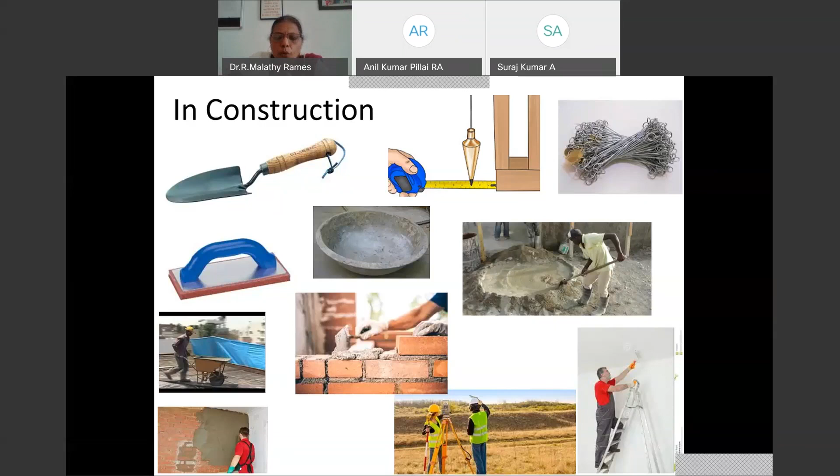In such a case, definitely we have to move towards digital construction. This is what construction 4.0. What is that construction 4.0? It is nothing but revolutions in industry. Earlier we have industry 1.0, which is mechanization, steam power, weaving loom. Industry 2.0 is mass production. Industry 3.0 is automation, computers and electronics. And industry 4.0 is cyber physical systems, internet of things and networks.

With these technologies, manufacturing industry is going to face a tremendous change. The earlier steam engine, everything has gone. Now the new manufacturing technology is completely digitalized. In such a case, construction 4.0 is facing the fourth revolution in construction, in which 6 technologies are going to play a vital role. Definitely these technologies will make the client satisfied with the fastest construction and also quality construction, and a systematic way of construction is possible with this fourth revolution.

So virtual reality and augmented reality, prefabrication, 3D printing, drones, internet of things, and artificial intelligence - these 6 are going to play a role in very near future in the construction industry, making civil engineers and construction technologists work in a fast and comfortable way. We can also work like an IT engineer in a hi-fi environment, not going to site and standing under the sun, looking at quality and struggling with uneducated laborers.

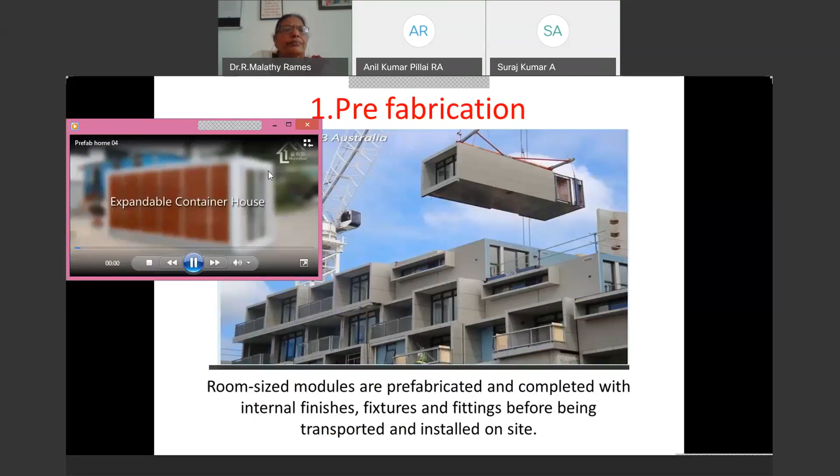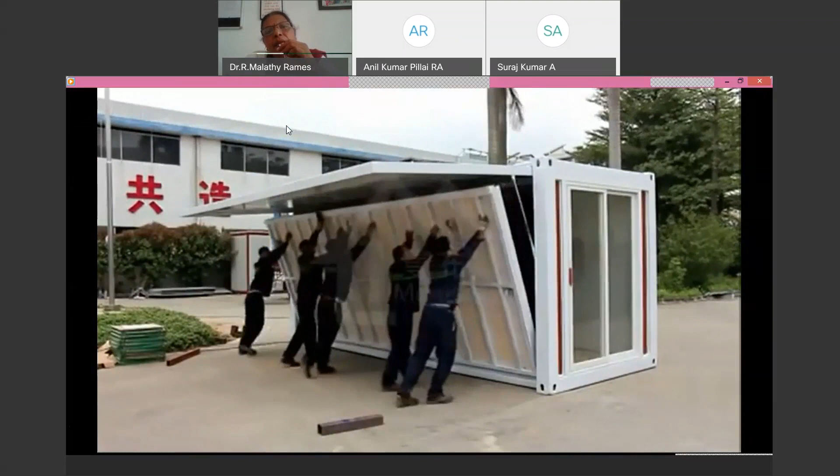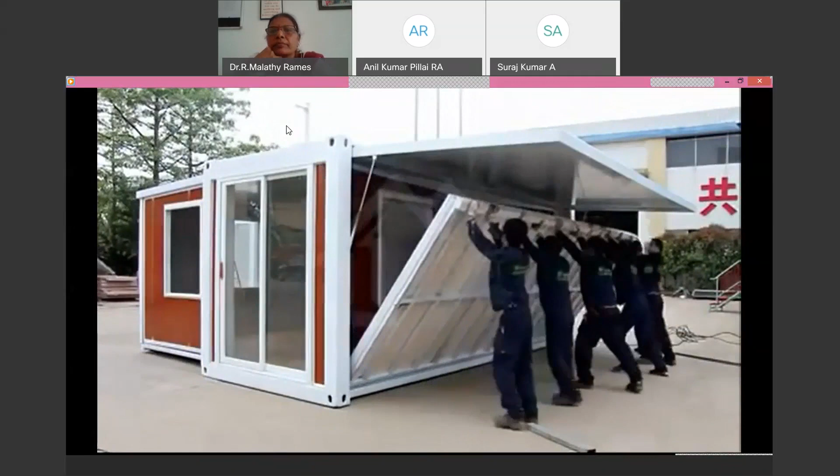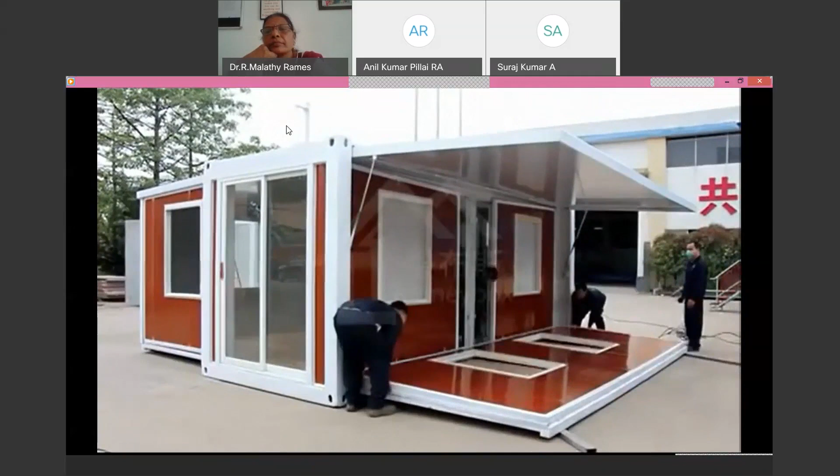It's container-like - a house is made and it can be assembled at the site. So whenever and wherever you want this house, you can make it and transfer this container anywhere. The doors are fixed, windows are fixed, locks are also there. Flooring is completed, and you could see that the toilets and bathrooms are finished with tiles.

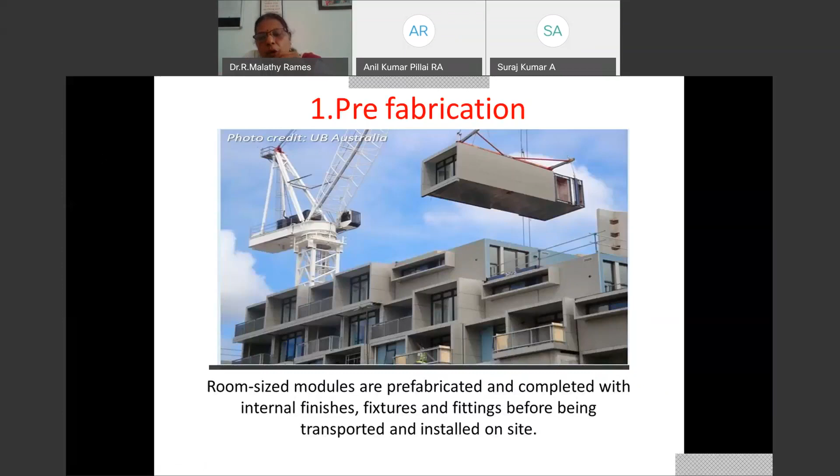So this is the advancement in prefabrication and modular construction. You can see this picture - the complete office room is being erected at the site, and you can have modules like this prepared in the factory and assembled at the site. This makes construction very fast and simpler, and it will not affect nearby buildings. Without any dirty things, we can make it very fast, and overnight you can assemble everything. This is the faster way of construction that's going to happen in the future.

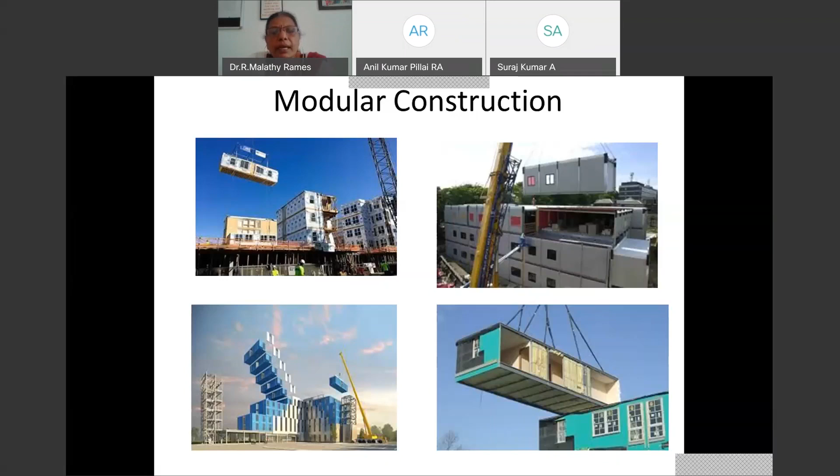So only the precast industries are going to make the modules as per ISO standards and other requirements. All the checks will be made at the factory before assembly. As civil engineers, we have to learn about the new materials used in these precast elements and how the joints are made. We need to understand this better, and our involvement in the design part is going to be very high.

Good, very good. So let us go to the second technology in Construction 4.0, that is virtual reality and augmented reality. What is virtual reality and augmented reality? Both are almost the same with some differences.

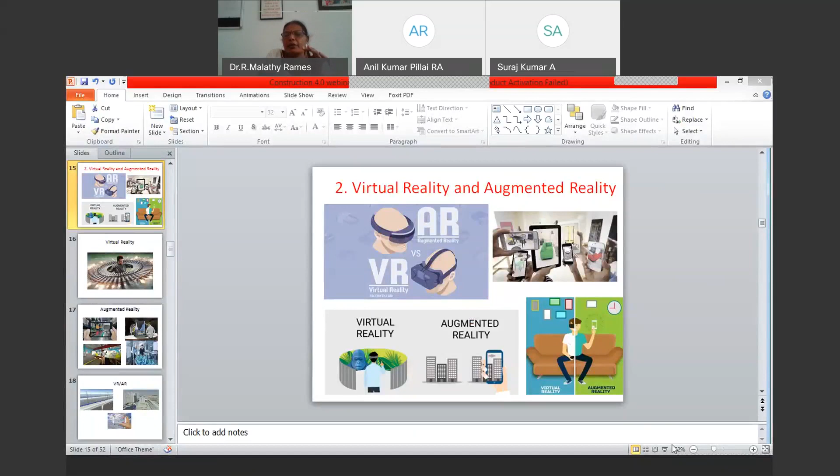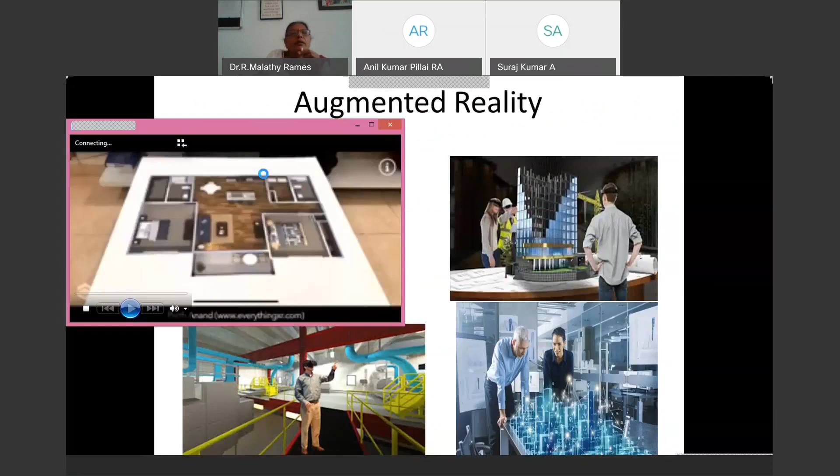So here he is doing this with the plan - he is able to visualize where the pipelines are going and how the buildings are projected. He is seeing it with the naked eye, but it's not possible without some mobile or laptop with an app. If you download that app, you could see that, through this mobile app.

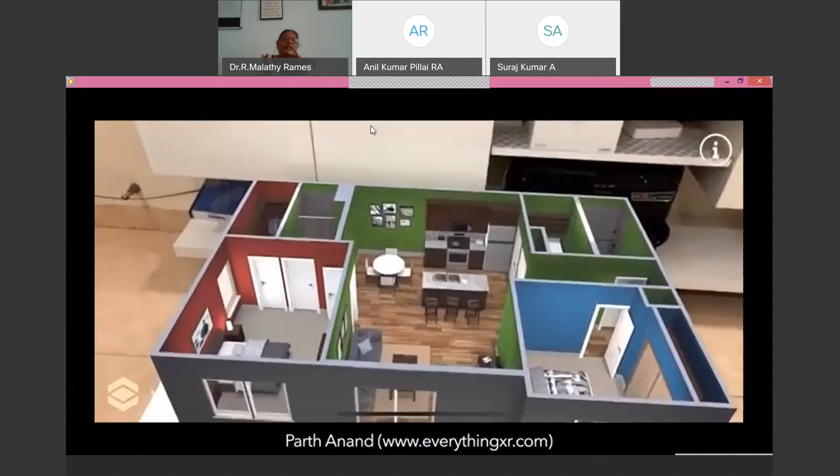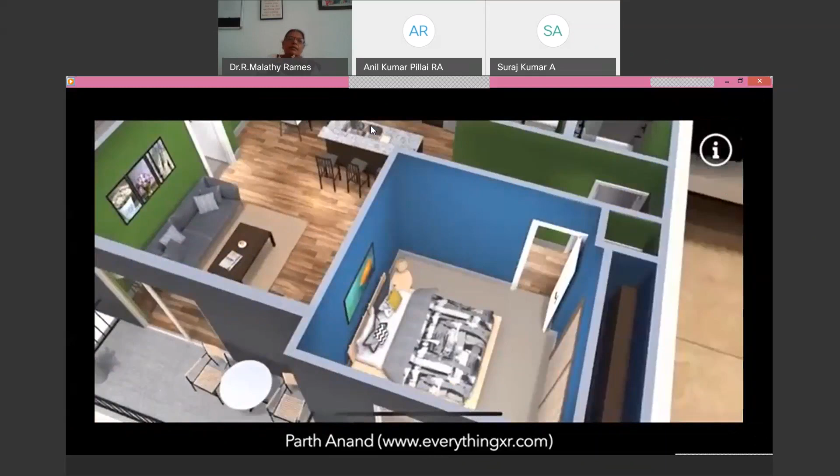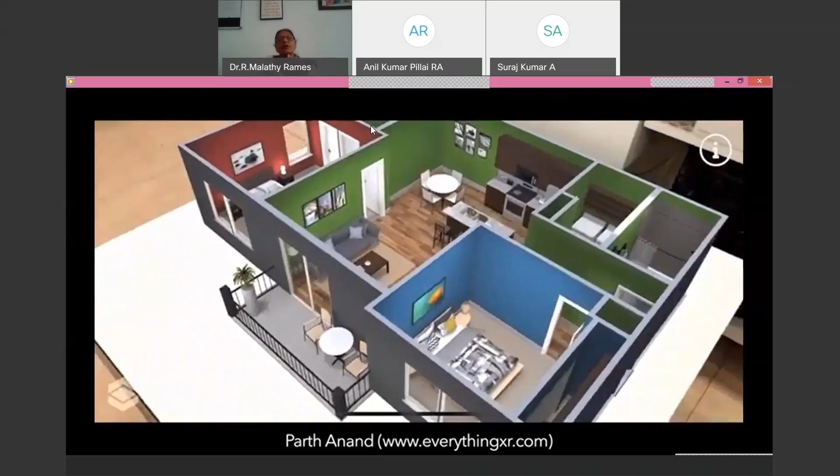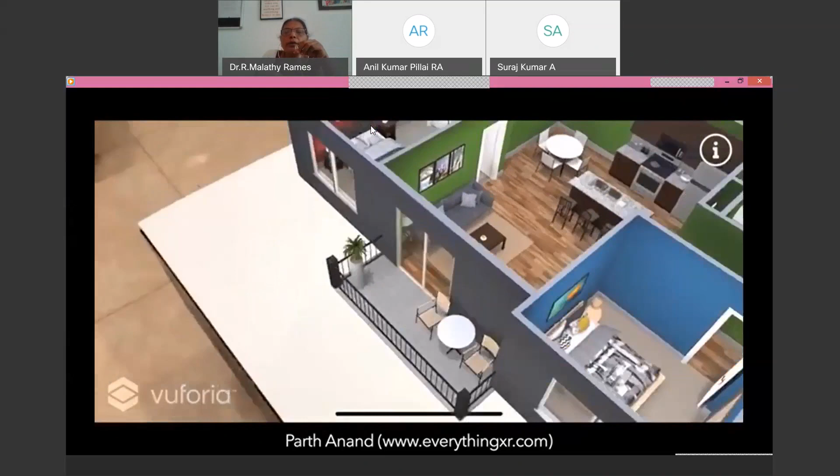This is augmented reality for architecture. The plan of the building is shown in a projected way with the paintings, where the partition walls are, where the bedroom is, how the beds are arranged, where the dining hall and hall are - everything you can show to the customers with augmented reality, so they understand better how the building in future is going to be. After construction is over, during construction, clients change their mindset and change everything. But if you show them at the initial stage itself, they understand the finishing of the building, so whatever changes they want to make, they can make at the initial stage, and understand better their future dream house. This is the advantage of augmented reality.

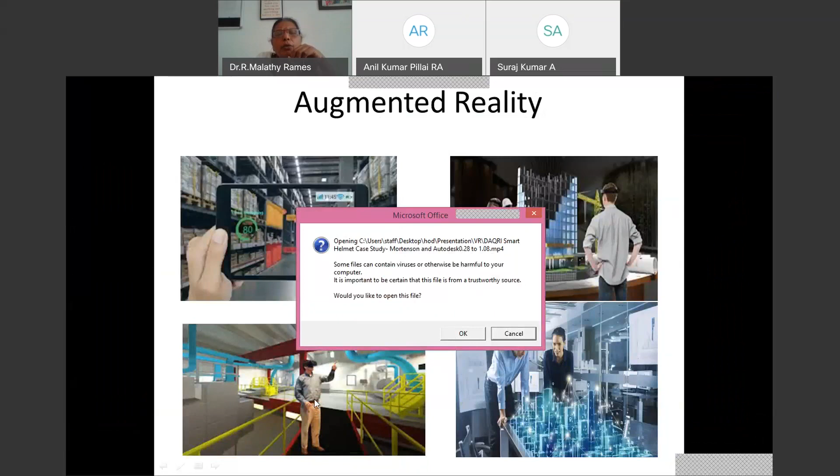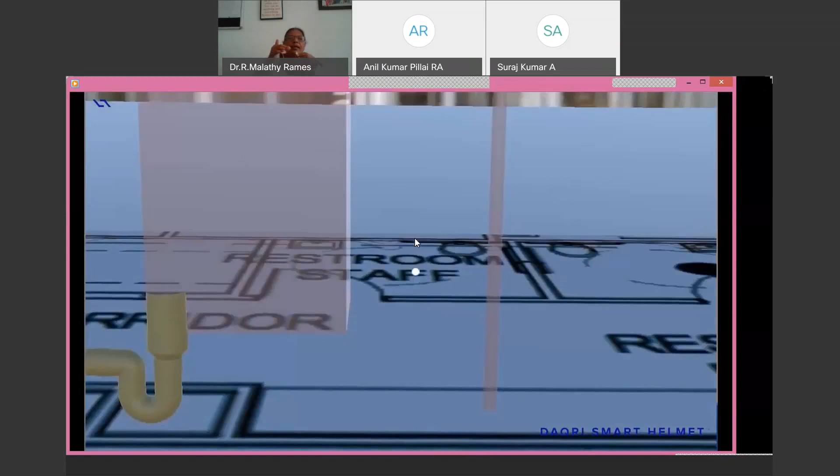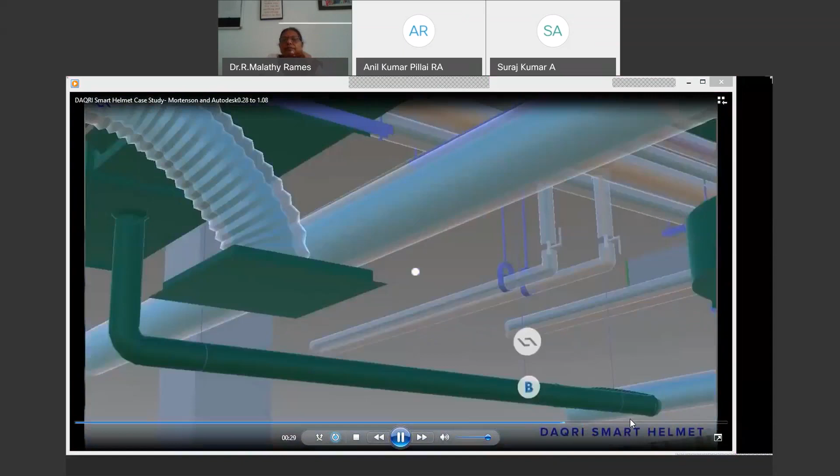In virtual reality, you have to wear some gadgets - that is the difference. If you wear this helmet-like glass gadget, just by crossing that particular place, it will show you, according to the plan, where the pipeline is coming. You can see the AC duct and pipelines. It is a smart helmet - just wear it and visualize the plan.

This is virtual reality. So in augmented reality, you can augment the things as a 3D object, viewed through mobile phones, tablets, or iPad. But here, you wear the gadget in which the software is installed. Just by walking through, you could find out where the pipelines are going, where the AC duct is going, and where the wall is - everything you can find out.

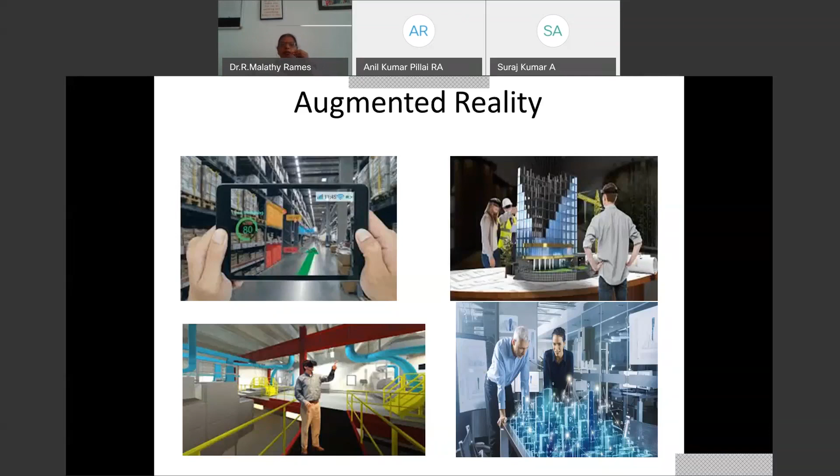By using augmented reality and virtual reality, you can very well satisfy your client about their building or construction, how it will be in future, and what measures you have taken for making that building effective.

For example, for a flyover or bridge construction, if you want to submit a DPR, detailed project report, to the concerned authorities or ministers, just showing them the plan, they will not understand.

Whereas if you show them virtual reality or augmented reality, by which how the roads are going to be constructed, where it goes, where you will have the toll gate, how during construction you will manage it without affecting the traffic much, and what preventive measures you are taking, everything you can very well explain to them.

For example, you can see this video, you will understand better.

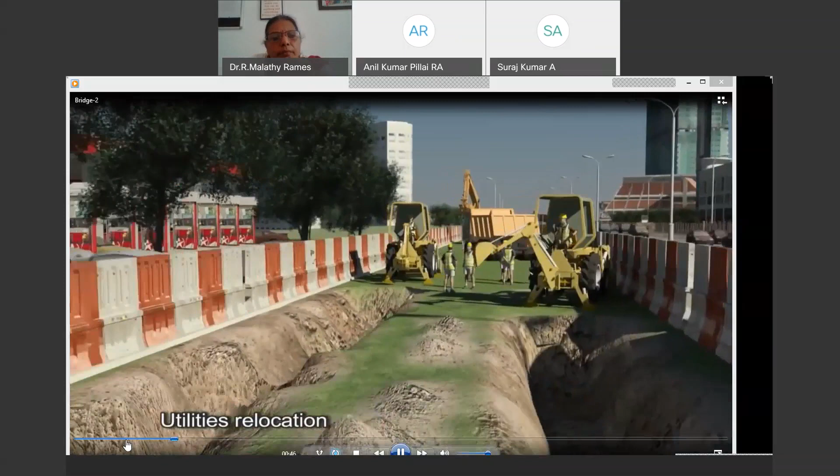See here, the construction is going along the side of the road, how the work is going on without affecting the traffic, what safety measures you are going to take, how the relocation is being done, and how the cables and pipelines are going to be managed.

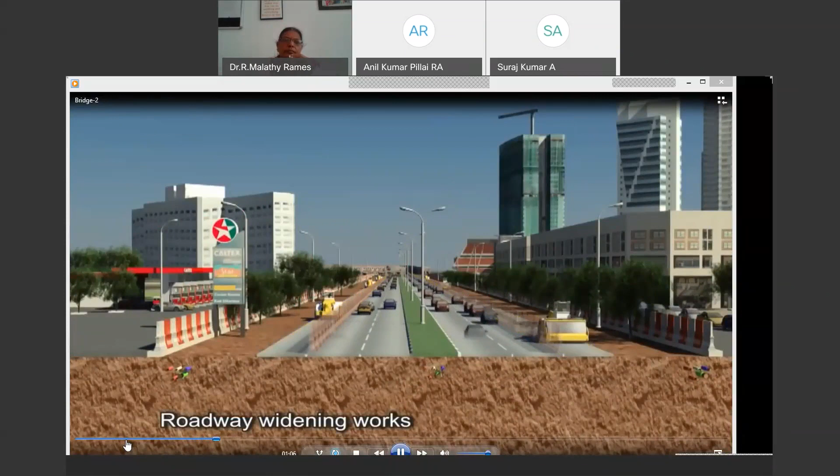Suppose if you want to widen the road, how are you going to make it? Suppose in the center portion you want to do some construction while traffic is allowed on both ways, how are you going to do it without affecting the traffic, and the road user should not feel uncomfortable?

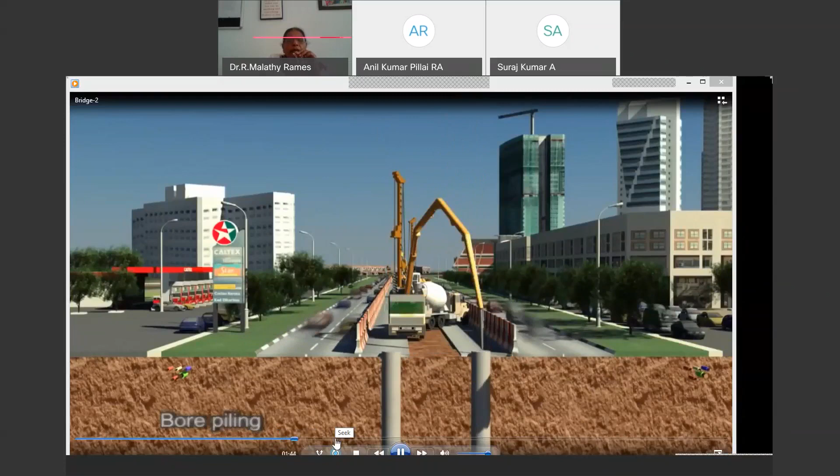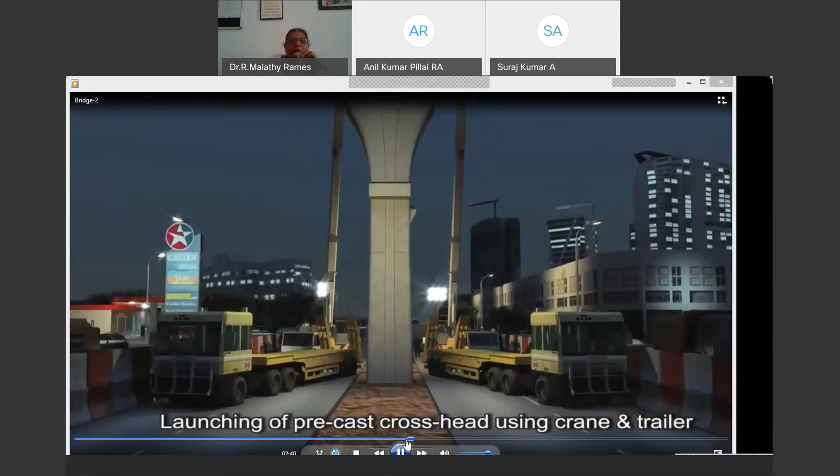In that way, you can make it with safety. You can show them how the precast crosshead is being erected during night time without any traffic, and how you are going to make it.

So that you can make the construction time much shorter.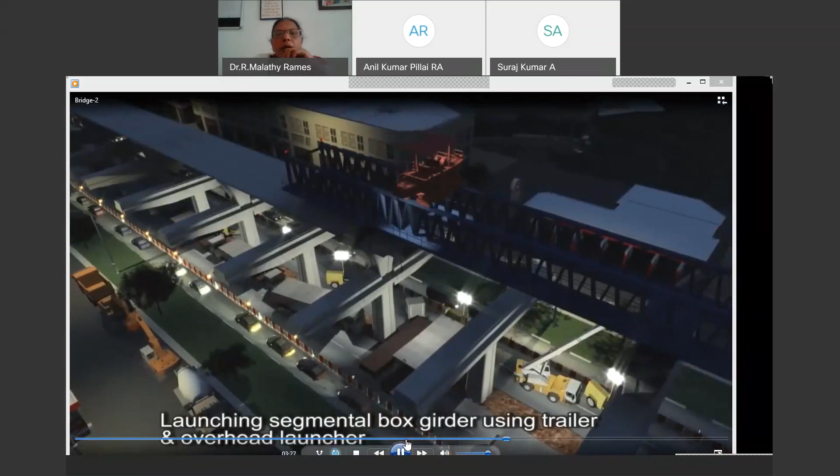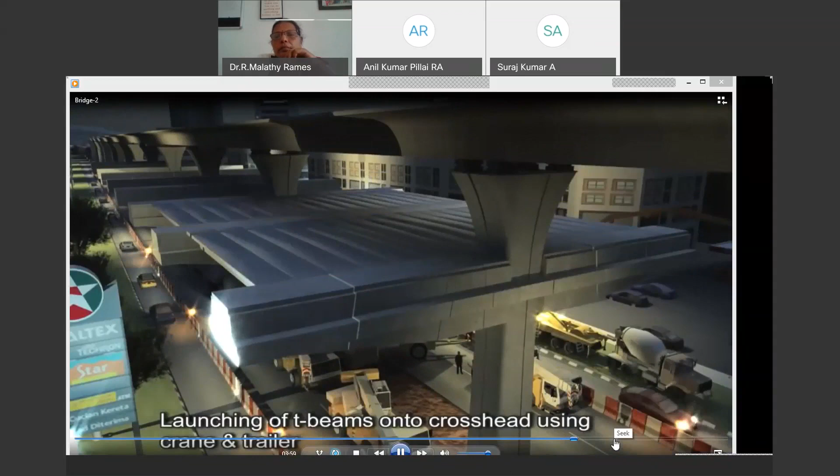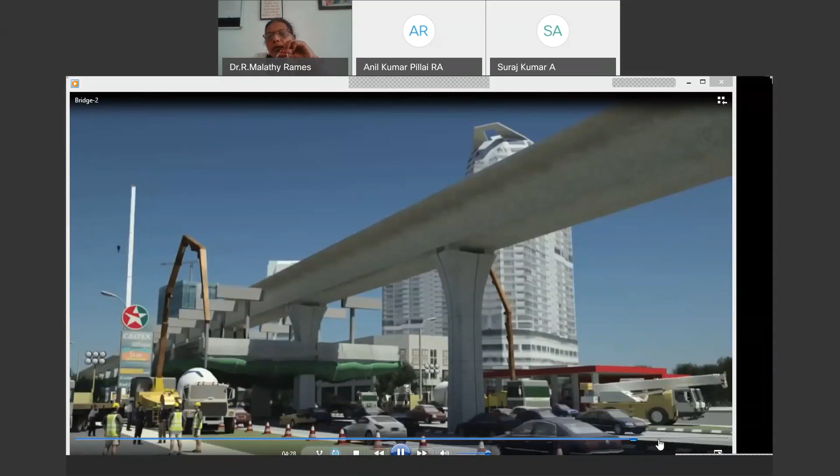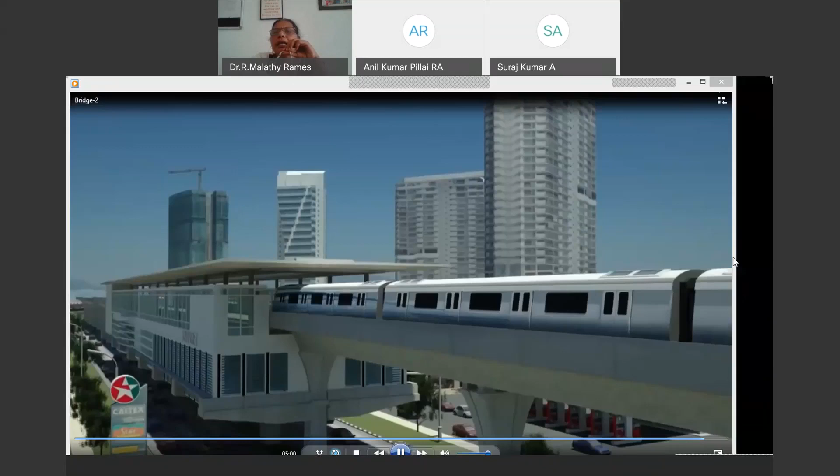So all of this is virtually shown. It is not real, it is virtual reality. How each and every stage of construction is going to be performed can be explained to the concerned authorities and ministers very well. They will understand better, so that we will get the project.

So in such a way, if you know these tools, apps and software as a civil engineer, we can play a very good role, so that we can make construction easier and faster by having these technologies. So one is prefabrication, and another one is virtual reality and augmented reality.

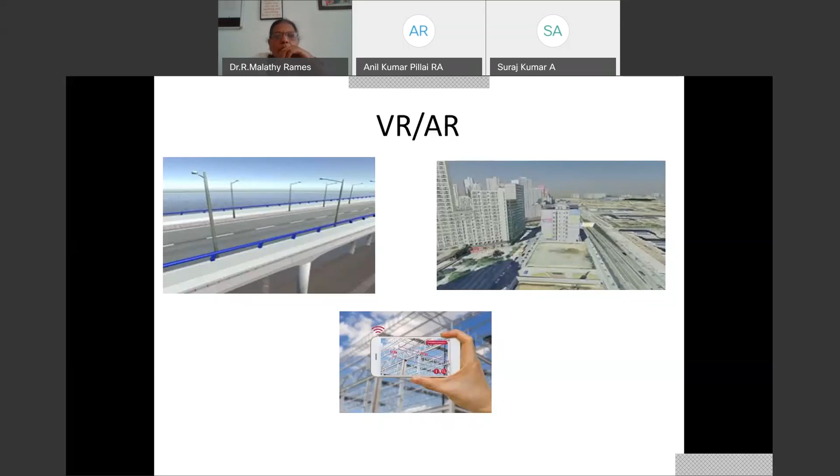Before going to the third one, let me have the answer from the participants.

It's very simple, very very simple. 256. Venkatesh, yeah, you are right. 256, Hari, I think Venkatesh has got it. Very good, very good. So 4 power 1 is 4, 4 power 2 is 16, 4 power 3 is 64, and 4 power 4 is 256.

Good, so next let us go to the third technology, that is drones. Drones are used for surveying purposes in the construction industry, not only for surveying. There are many more applications using drones, which will make the construction industry faster, quicker, and with quality. So in future we are going to have drones to monitor the buildings.

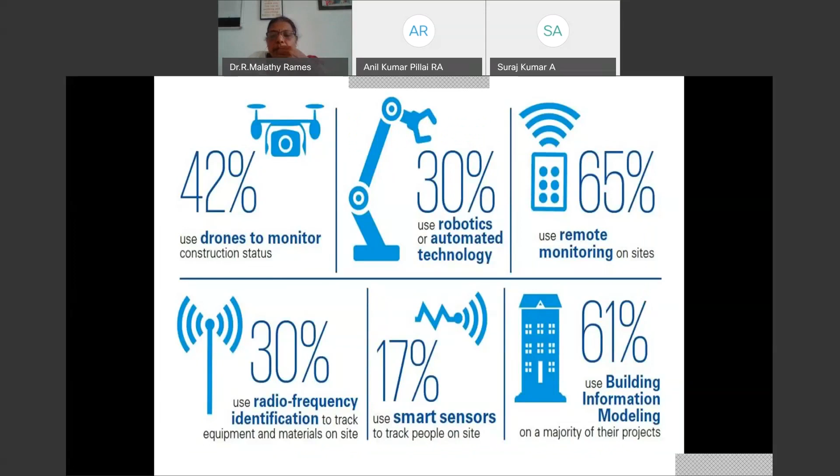30% robotics and automated technology are going to come. Remote monitoring, radio frequency identification, smart sensors, and BIM, building information modeling, are areas in which drones are going to play a vital role. So in the construction industry, drones are going to transform the entire industry.

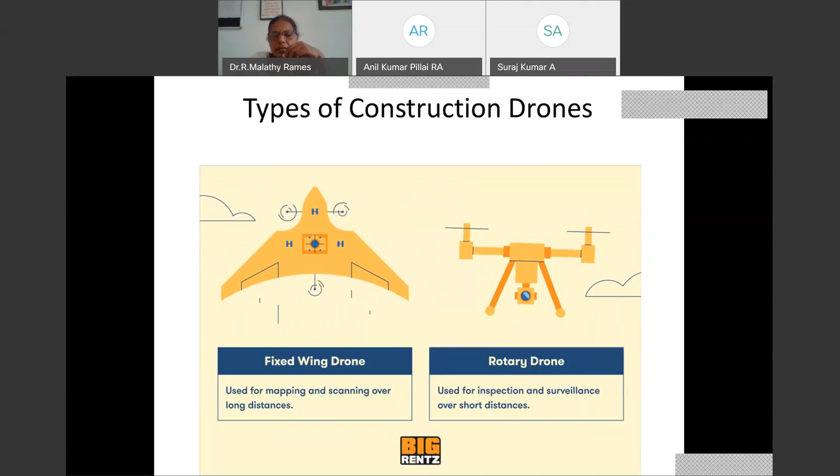We can have two types of drones. One is fixed wing and another one is rotary drone. Rotary drone can rotate 360 degrees and capture images.

Actually, a drone is like the small helicopters you might have seen used in marriage receptions to capture images and video. The same thing, with high resolution and sensors, that will be a drone. The main purpose of using a drone is only to capture the image, and from the image we have to analyze and interpret the data.

GPS, the global positioning system, we can have it, and a thermal sensor should be there inside the drone, along with very high resolution cameras, and there is software to manipulate and interpret the data. So this is what the main things involved in the drone are.

So you can fly the drone to any place you want, and it will capture the images. From the images, you have to interpret and give the output. The images you take, you have to post-process using some software, so that only then can you interpret the data very well.

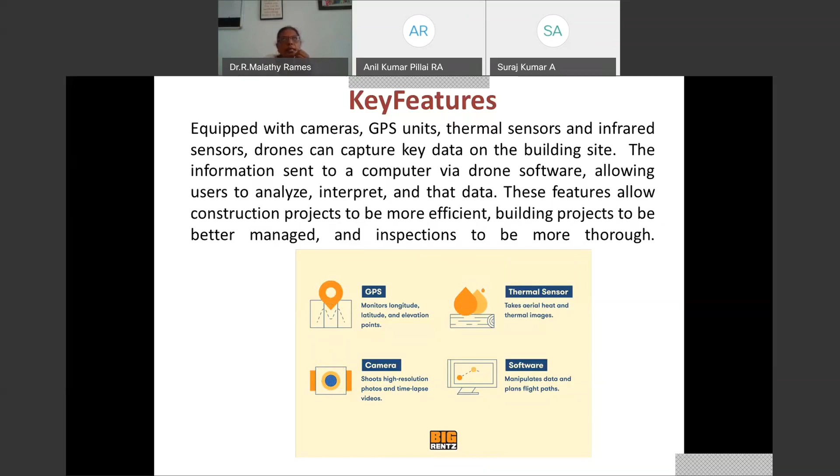It depends upon the post processing—only then you will get highly accurate results. This is used for topographic mapping, land surveys, equipment tracking and automation.

You can use it to keep track of each equipment's location on a job site, recording errors and malfunctions. Suppose you need not go to the site and supervise it—from your place itself, you can view what is going on. The drones will capture everything, and through artificial intelligence, you can track the vehicles also.

Suppose, for example, you are sending a vehicle from one place to another. In between, the driver takes some time for some other purpose and it gets delayed—everything can be monitored. And if you are ordering concrete from an RMC plant, the RMC vehicle coming from there can also be monitored.

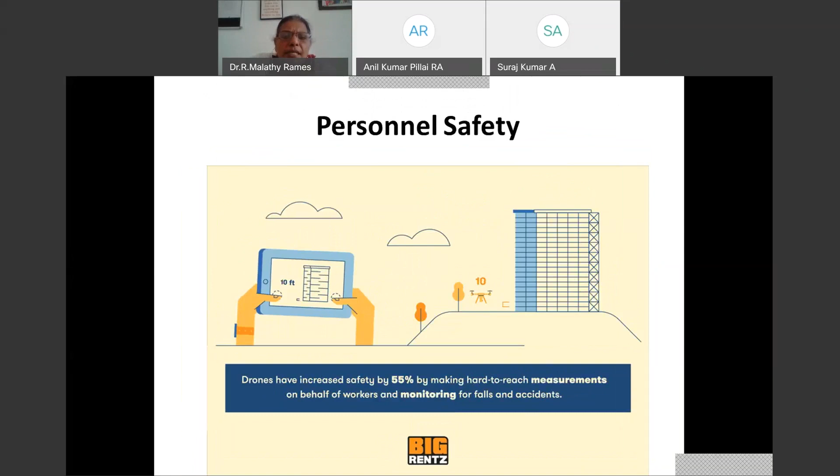You can also monitor the construction progress—per day you are aiming to complete the building to a particular height, so you can monitor whether it is going as per schedule or not. Remote monitoring and progress reports are possible, security surveillance is possible, personnel safety is also possible, and you can inspect the structure.

Suppose concreting is going on in a very tall structure in a marine environment—you cannot go and see whether the work is going perfectly, whether the concrete is being done properly. In that case, through drones you can capture the image and find out whether there is any flaw in the concreting or any honeycombing. Everything you can see.

So this is the advantage of going with these drones. It can be used for railway tracking and highway alignment, even for painting. Crack detection can also be done with this drone.

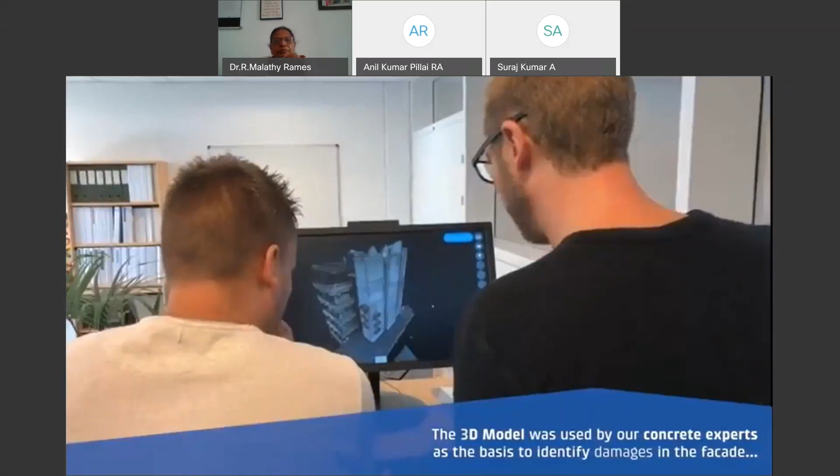So see here, the concreting work—it captured images from which you can see it live. Whenever it takes a picture, it is being viewed live, whether concrete spalling is there, or concrete honeycombing—everything you can view.

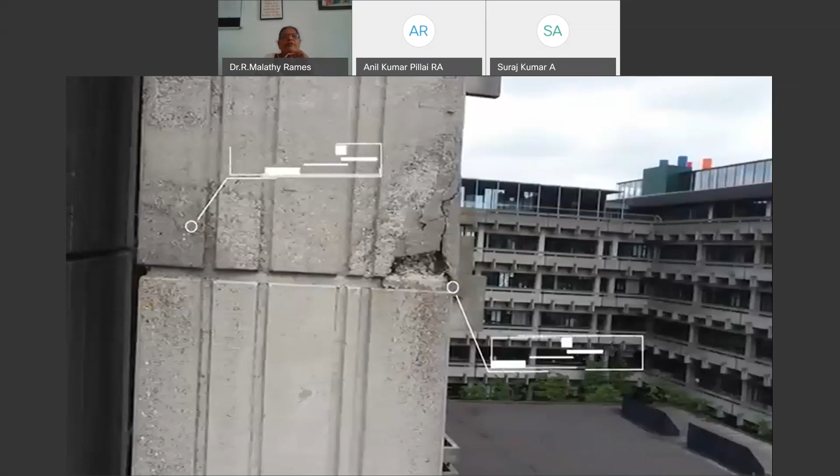So the drone application is not only for surveying—you can also use it for crack detection, road repair, everything is possible with these drones. And the advantage of using drones is that they are very fast, even for 100 acres of land in a forest area.

In Sona, we have done surveying in Karnataka in a forest area. A man cannot go inside and get things done, but by using drones, within 2 days we covered 100 acres, and within 1 week we gave them the survey report. So this is possible with drones, unlike the traditional way of doing surveying manually by going to the place.

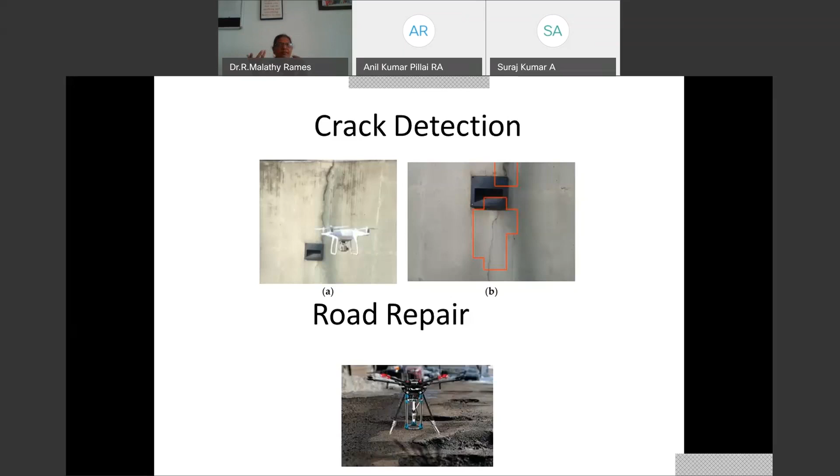For inaccessible areas, you cannot go there—even with the total station it is not possible. In such a case, you can very well use drone surveying, so definitely it is going to pay off. In future, nobody is going to the site with a leveling staff and a tripod—just a drone will do everything. So this is the third technology.

Before going to the fourth one, can you get the answer? I think nobody has typed it till now.

Move one stick and fix the equation. Right now it is 6 plus 4 equal to 4, which is wrong. Try to move one stick and keep it in another place so that you can make the equation right.

Most of them would know 6 plus 4 is equal to 10. 0 plus 4 equal to 4, good. 5 plus 4 equal to 9, also good. One more answer—8 is also there, is it? Yeah, 8 minus 4 equal to 4. There are 3 answers.

0 plus 4 equal to 4, 5 plus 4 equal to 9, 8 minus 4 equal to 4—I think many of them have put it, yeah. Very good, very good.

Now let us come to the fourth technology, that is 3D printing technology. We have 3D printers now—you might have heard about 3D printed concrete and all. 3D printing technology is actually being used for jewelry purposes.

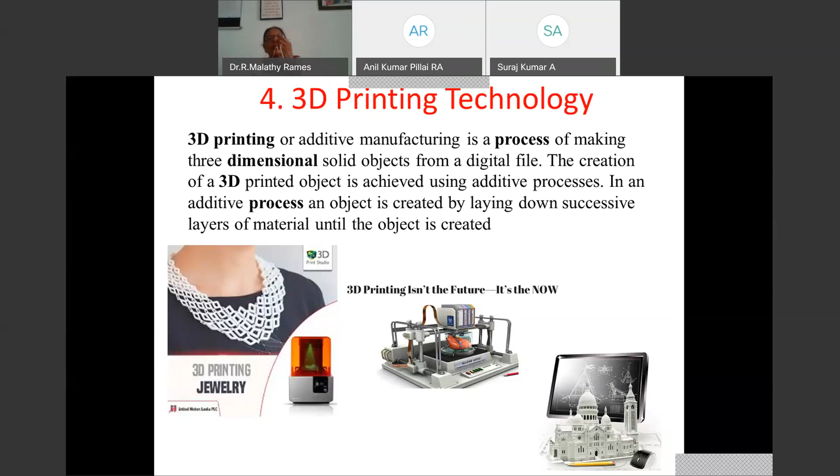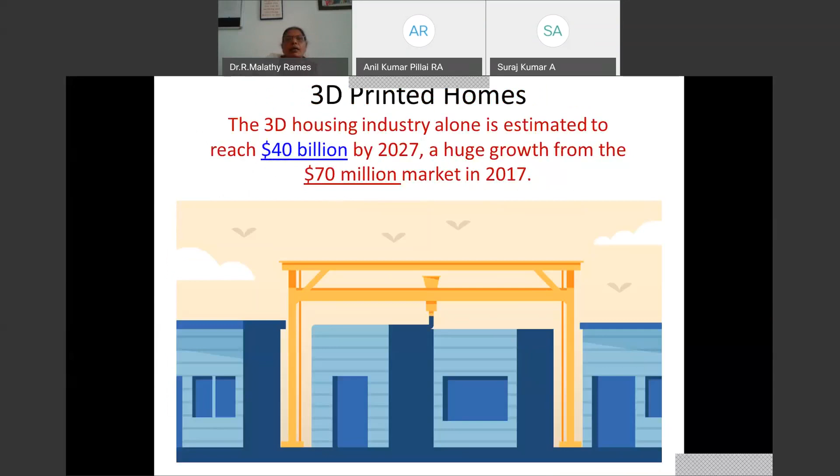So this 3D printed housing industry is going to be huge by 2027. Huge growth is there in the market, with innovative building materials and 3D green buildings with these 3D printed homes.

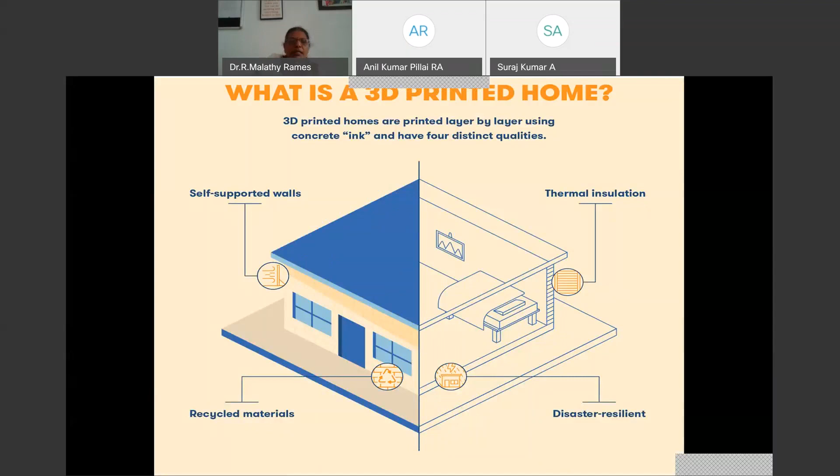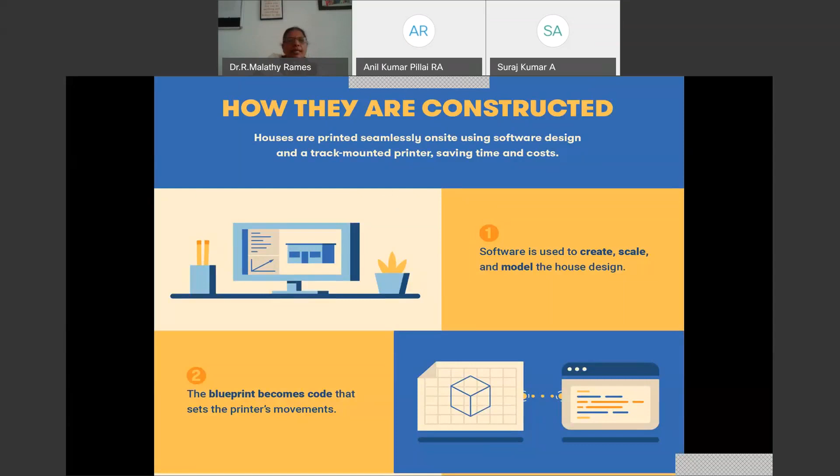You can have 3D printed homes with thermal insulation, recycled materials, and so on. For this, what you need is the software. It is used to create, scale, and model the house design. Then you have the blueprint code.

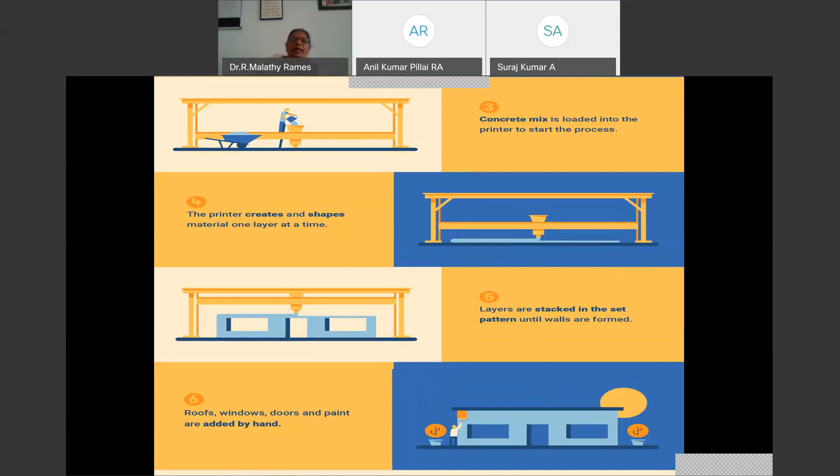Then the concrete mix is loaded in the printer. The printer creates and shapes material one layer at a time, and layers are stacked in the set pattern until walls are formed. Then roofs and windows can be added. If you see this video, you will understand better how 3D printed homes are made.

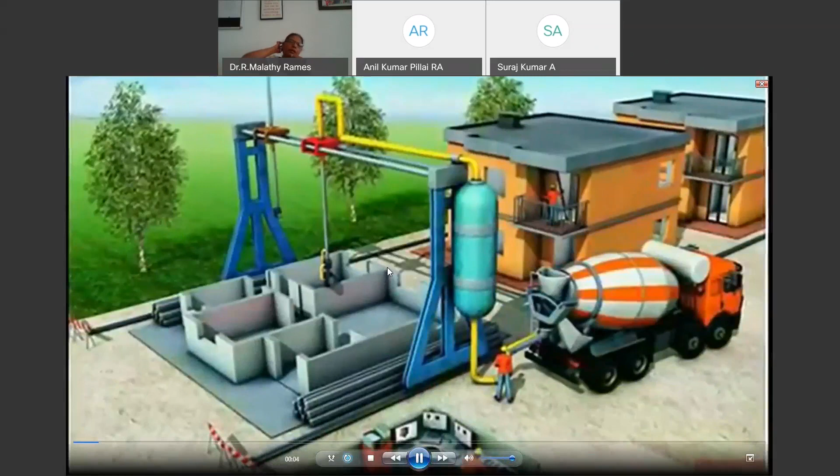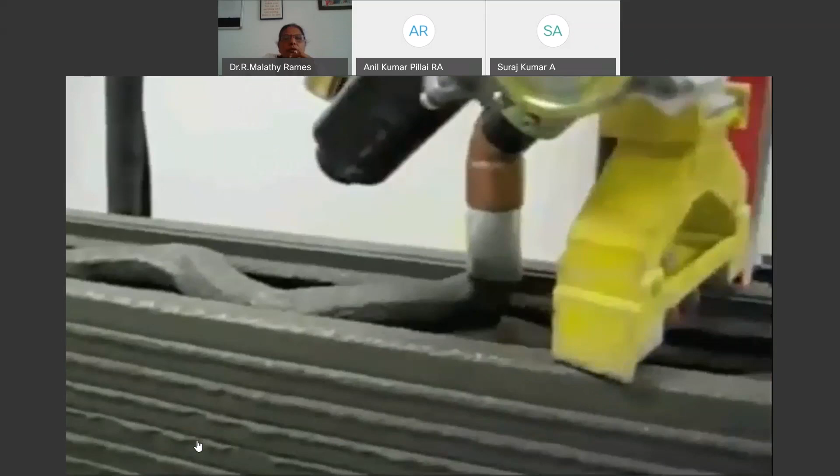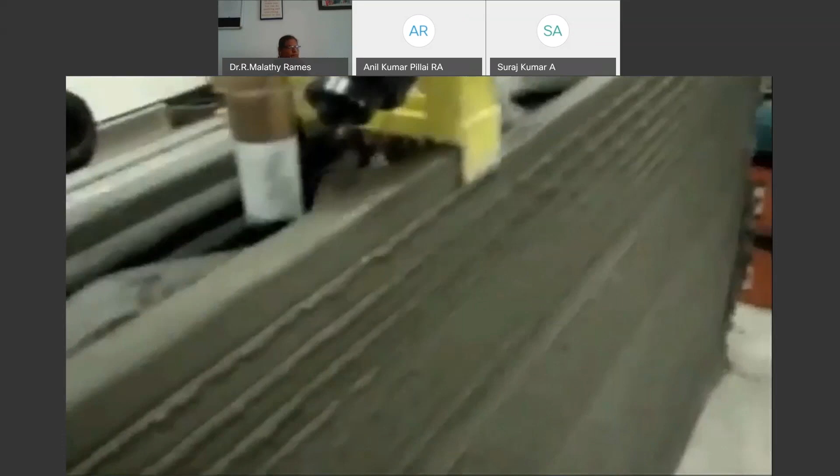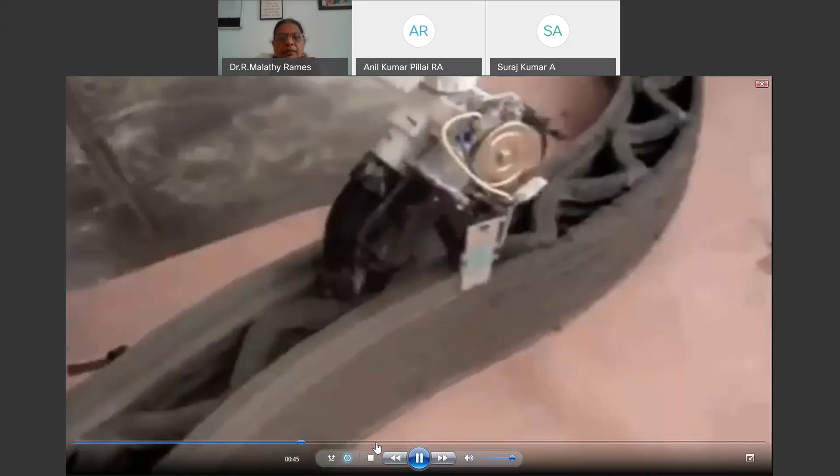So here you can see the printer will print it. You can very well make the layers, and all the parts, everything can be done. So this is the completed form, and you can complete the roofing also.

Even on the moon, you can construct buildings using this 3D printing technology. On other planets also we can construct, and this is picking up. In future, for mass construction, you can go with 3D printing technology, with no need of supervision, no accidents, no labor required. Just a skilled person to monitor the things is sufficient. So this is what 3D printing technology is.

Before going into the fifth technology, let us have the answer from the participants. Guess the next three letters in the series.

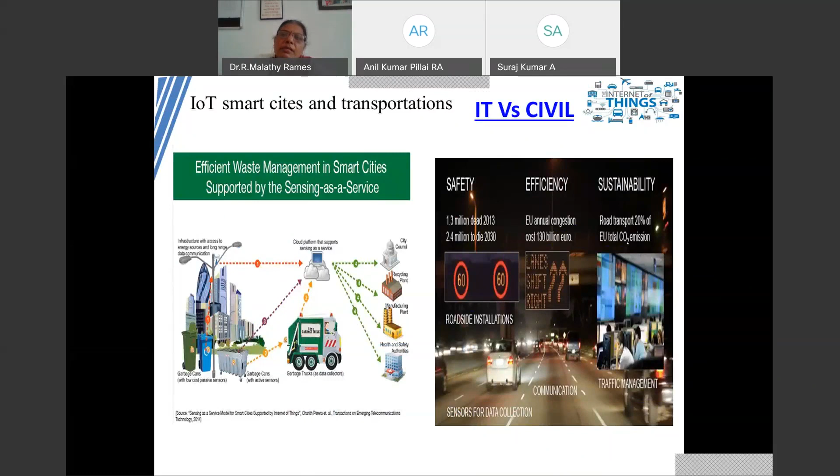So the next technology is artificial intelligence, but before that, let me get the answer for this question. Sir, how long can I continue? Another 10 minutes? Yeah, please, you can go on, no issues.

So the last technology is machine learning or artificial intelligence in construction. We are going to face the labor problem, and it will be solved by using robots. In the construction industry, automation and robots are already there in foreign countries; in India, it has yet to come up - there is a long way to go. Now robots are also used as cobots.

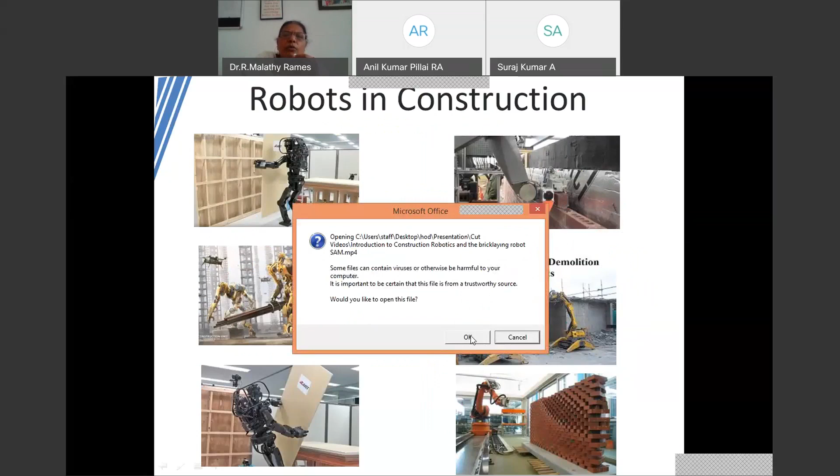For example, there are around 104 participants here, and whatever I am giving you, all 104 participants will not take it 100% and will not implement it 100%. But if you give it to a machine, whatever intelligence you give to one machine, it can be replicated to other machines, and 100% efficiency is possible. In that way, robots are used in construction industry for many purposes - bricklaying, mortar fixing - everything can be done with robots very fast and systematically with quality.

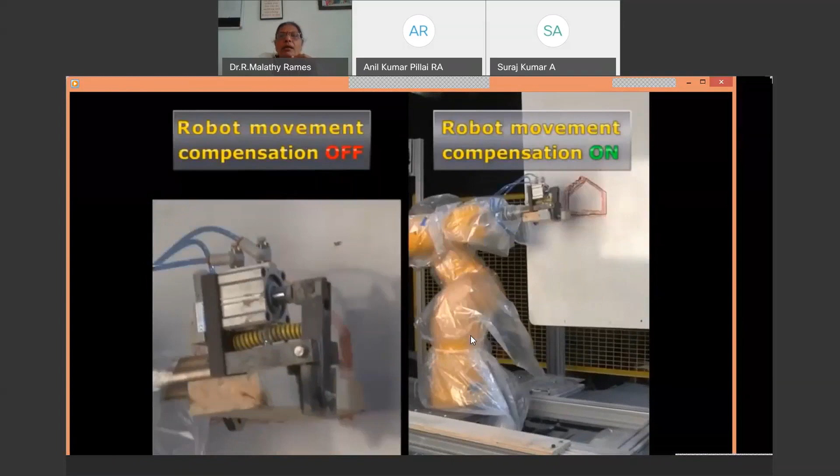So here, automatically it takes mortar with the same thickness, same quantity. Even if you do it manually, it cannot be done like that - see here, the robots are doing much more work, so the efficiency is 100% and it will do it automatically.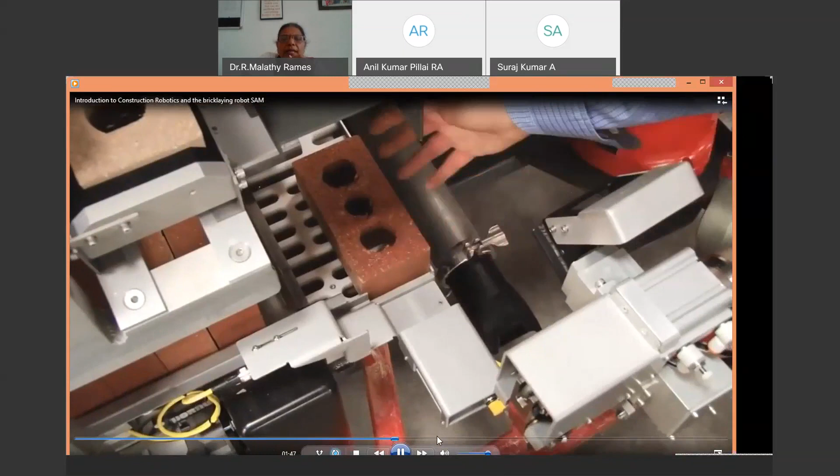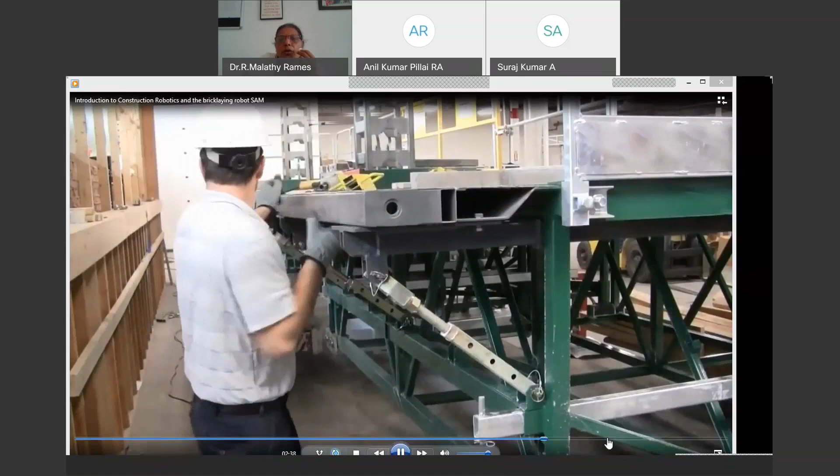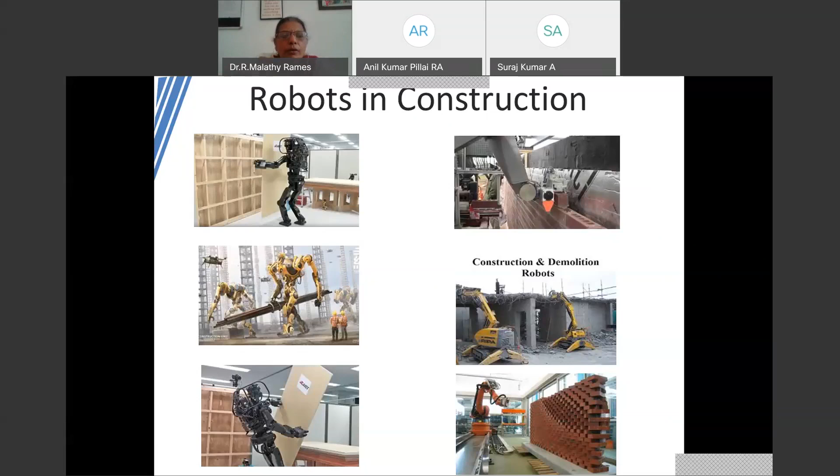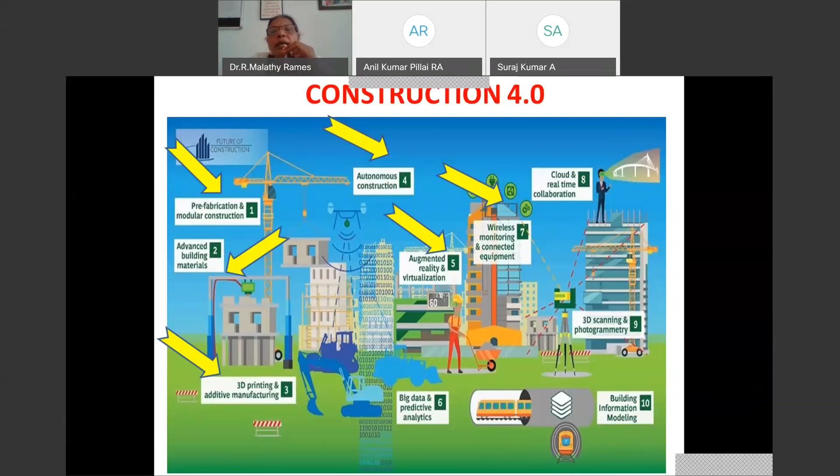Then there will be a tremendous change. There is a paradigm shift in the construction industry going to be there in future. So we civil engineers need not feel that I am working under the sun, whereas IT engineers are working in office. But even then, as a civil engineer, when we go to the site and see the structure, how it grows, that gives us some satisfaction.

But these technologies are not going to stop that, but these technologies are going to make us very simpler, ease of construction, ease of working with a hi-fi environment. We feel very comfortable with this environment, and we can play with the technologies. We can be creative, innovative, and we can make everything very easy and fast.

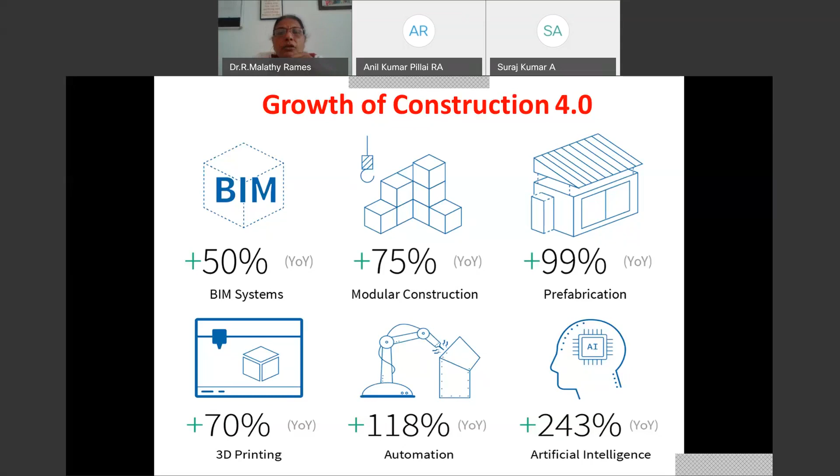And also there is a systematic way of construction going to happen now. It is with the masons and laborers, the quality of construction is not ensured, and we cannot complete the work within a stipulated time. But everything will not be there in future with these technologies.

So definitely the digital world is going to make us a lot of things. So now everybody with this mobile addiction and tablets and other things, particularly now in the COVID situation, we are always online. So definitely our construction field also should be a digital field. So if we learn these technologies and become expert in them, definitely we civil engineers can draw, and we can have a very quality work environment.

Thank you. Thank you for patient listening. I hope we can rock with these technologies in future.

Thank you very much, madam, for that interesting session on emerging technologies. As all of us know, civil engineering is going to be an interdisciplinary work, because when it coordinates with information technology, I'm sure a lot of things like this can be done. It was very interesting to see how there are a lot of possibilities in the area of civil engineering, and as I pointed out, a lot of scope is there to make things simpler, enable construction, and make it much easier.

So I think there was one question which was posted. The question is, what will be the role of civil engineers in the near future? How do we update, upgrade, and adjust ourselves to the changing scenario?